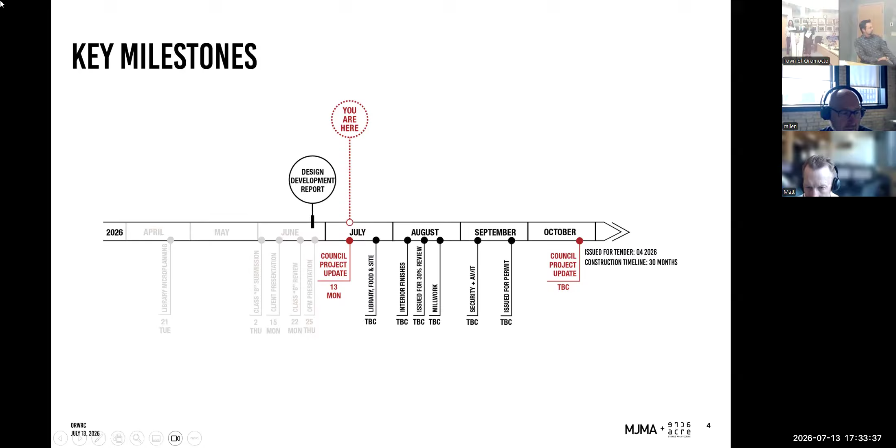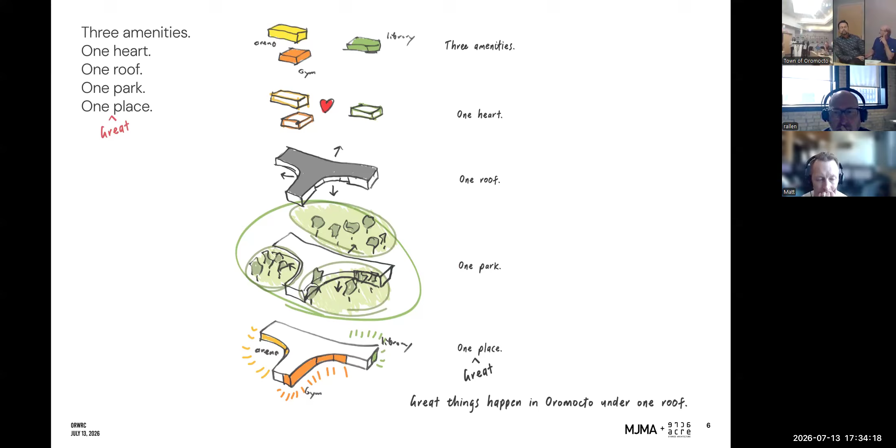So, design of the project: you have 3 amenities in this great project, and one heart, one center lobby brings everyone together. It's going to be the heart of your community, the heart of the park, under one roof, one park, one great place. We're pretty excited that great things happen in Oromocto under one roof. This concept that started early is really coming to life now, and we've stayed true to ensure that all these amenities help shape the goals and objectives you've asked us to hit throughout the project. The first one is that this had to be a destination, one great place, the advantage of taking all these amenities and bringing them together to activate your community and create destinations. That's what's grounding the project.

The second is that the project is a good neighbor by design, designed to enrich its surroundings, and made for magical moments, a place that people use, love, and make life memories in. This is a place you want to grow up and stay, a place that becomes part of your life and your memories, and its backdrop.

Our fourth story element is design at work: it's operationally smart, flexible, and built to bring value. And a place with a pulse - Oromocto is full of life, a destination that feels vibrant, alive, and in motion. Our sixth is from porch to park, connecting community to nature at your doorstep. The advantage of the 3 amenities is you come for a book, stay for the game - the idea that this is an inviting social hub, but all the program activates reasons to come and spend time in Oromocto at this destination.

We talked about these really early on in the project, and now we're seeing those outcomes through the architecture come to life. So I'm pretty excited to share those today.

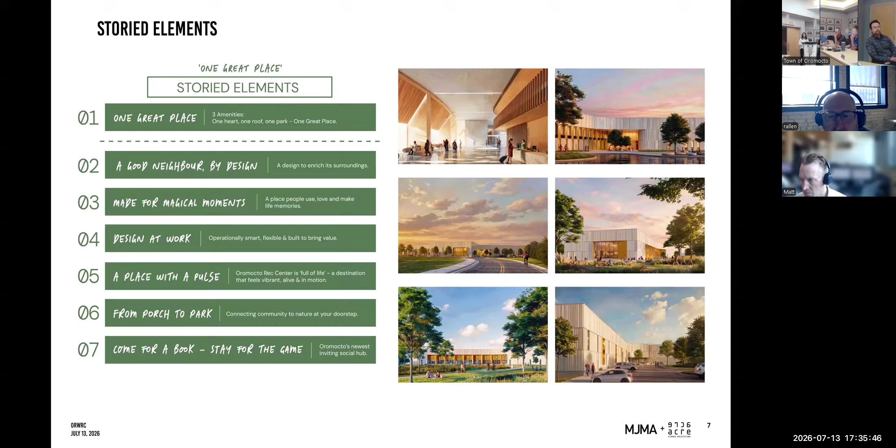Now there's, can I laser this or? Can I just get close? I think I might have done this last time too.

I think I'll just walk quickly. The right. Oh, yeah, all right, down.

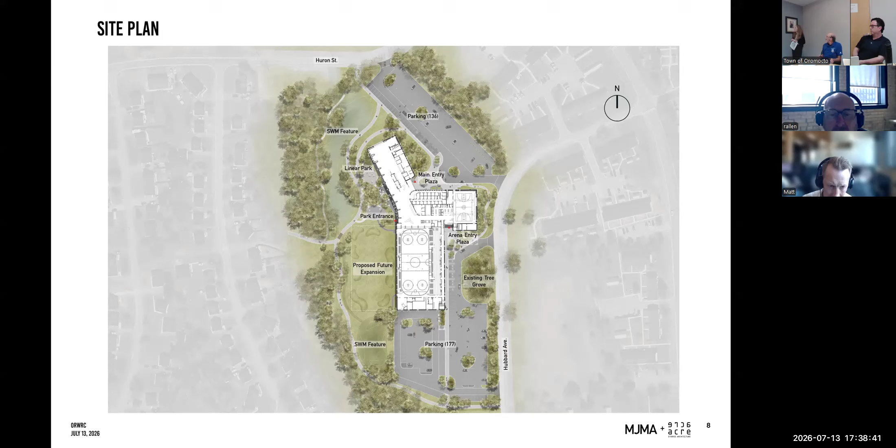How many parking spaces are there? In total, can you go to the site plan? I believe we're at 315. If I were to add those together, that is 313, I think, right now. So we looked at comparable facilities with a similar program to see about the number of parking spaces. I spoke with the staff and prepared some precedents to compare. We felt comfortable with that number.

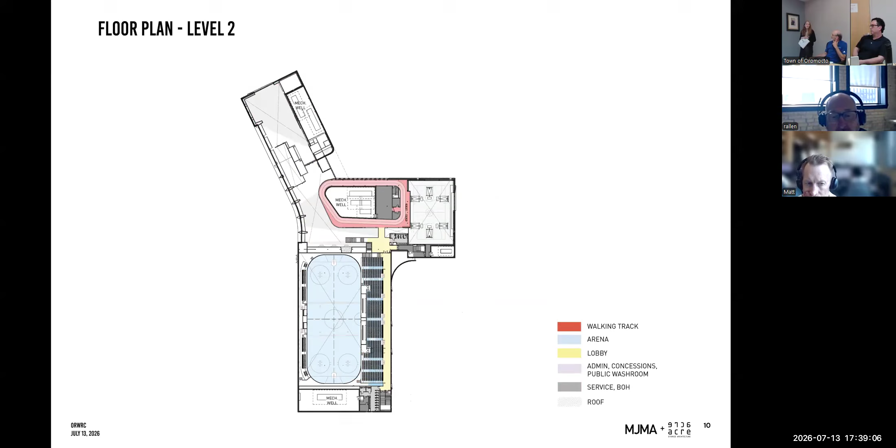So we're going to jump into Under One Roof. Do you want to speak, Monica, to the addresses?

Sure. One of the things that we talked about is the 3 addresses and the 3 identities. We wanted to make sure that each address was clear and distinct about where you come in, where you're going, and that it had its own unique arrival experience, its own identity and its own purpose, while all sharing an architectural language that created a cohesive whole for the project. So while we'll look at each one, Amy, you could walk us through each one.

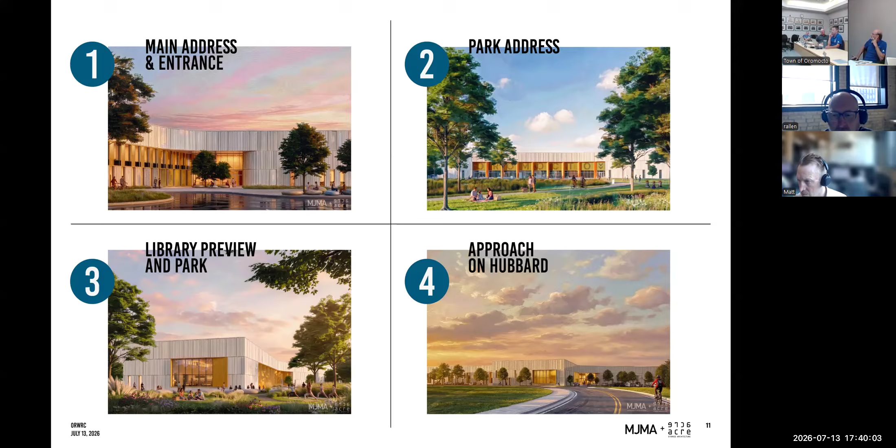The other thing that we have are previews. So sometimes when we have these big buildings, we don't know what's going on inside. So we have these great activators for the outside, where it's kind of like a window into the heart of the project, where you're seeing activity that's happening. So why don't we go through one by one and see what each one's looking like today. This is our main entrance.

So there's this large invitation into the main entrance of the building, glazing in transparency. This is our main address here too. So the articulation of the building welcomes you in, and that's going to continue into the building. You've got these continuous peeks and views into the walking track above, and there's some windows looking into the clinic below, so you can see that activity happening within the building. This is also a strategy where we put a lot of energy into the address and try to find a way to optimize the money on the rest of the facade.

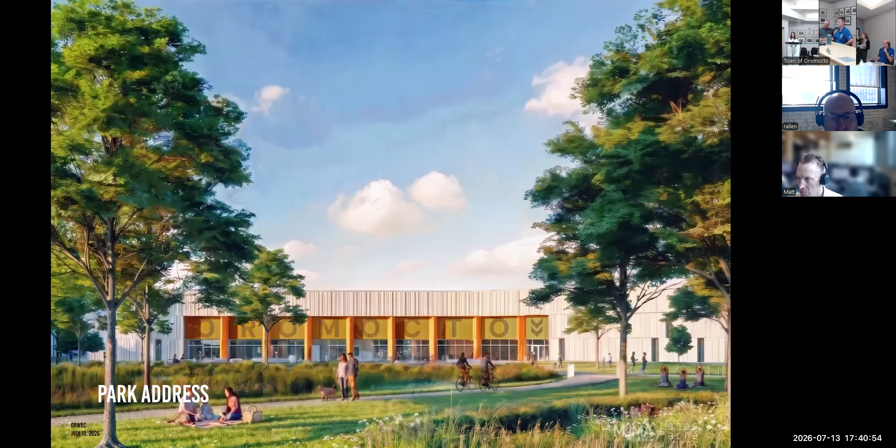So we're putting a concentrated effort at the addresses and trying to find value with the remainder of the project. So in the next one, this is our park address, the view from the west side looking back to the building. We've developed this address to create community pride, with the glazing stretching along from the library through the multipurpose room and the lobby, really creating that connection between the park and the building space.

So this is our library preview, that window into the life of the building or the library. This is the language we're using for the previews, this frame and shape around the larger glazing.

And then this last is a view of the approach on Hubbard Avenue with some upgraded sidewalks, which I think may be happening. But this is your main entrance here and your preview into your gymnasium space as well.

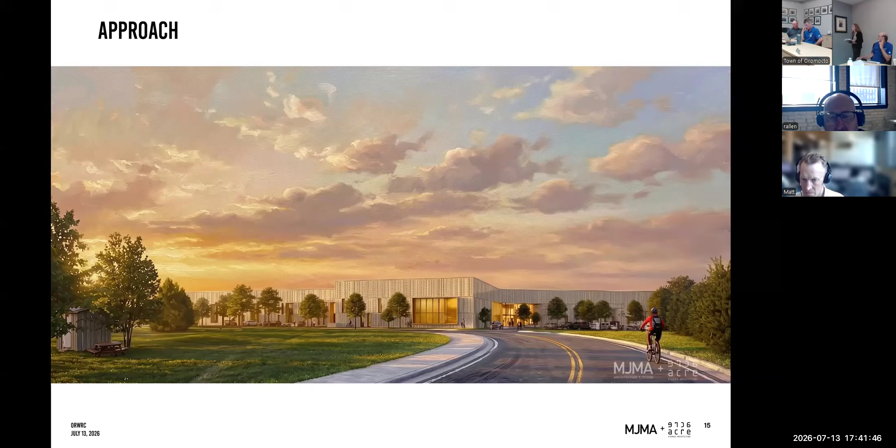So we're going to walk through the phasing. The building has been prepared to be phased should the town decide to phase the construction. The phasing here really did three things: we designed it for some reuse of the materials in phase one, it's meant to minimize disruption during phase two construction, and if phase one does remain longer than anticipated before the arena is built, we've designed it so it's a good looking building all the way around and consistent in its appearance.

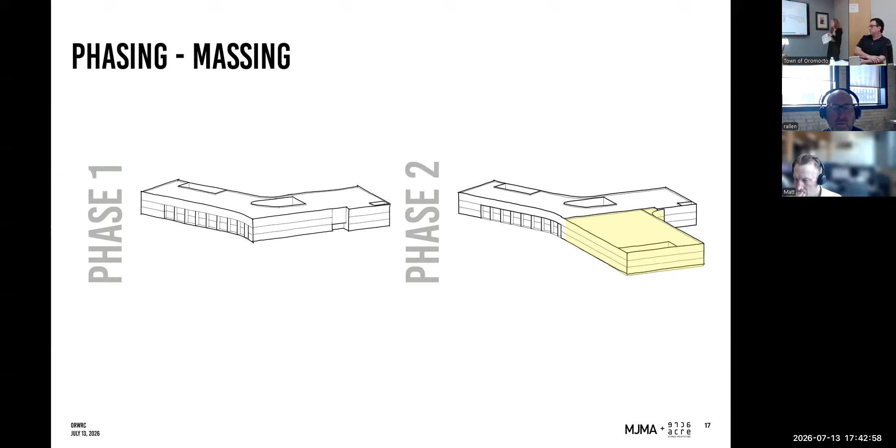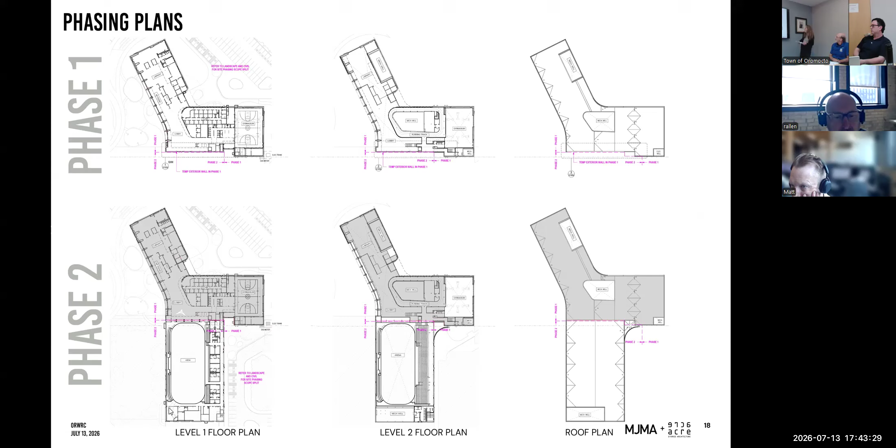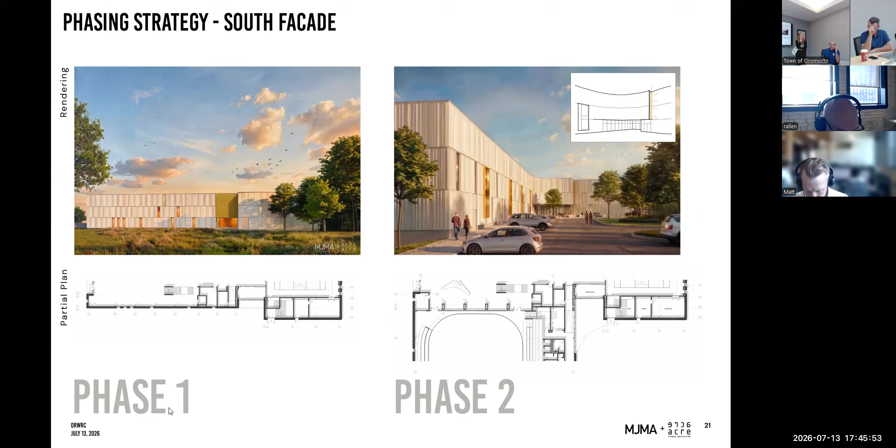Just a quick question about the phasing approach, because phasing could allow you to get a start on a facility that, if you wait for funding for the whole thing in its entirety, you may have to wait much longer. When I look at the building, I see it as three parts, though it's been presented as two: the main part with the medical clinic and gym, then the library, with the arena as a second phase. Is this drawing nimble enough? Because through federal and provincial partners there are different pots of funding for different things. So let's say we were able to secure money for an arena first, before something else. Does it have to be phase one the way you've designed it, where we get that first and wait later for the arena? My perspective is that if we're able to secure funding for any portion, as long as it makes sense, that's something we should think about.

If you wanted to do the phasing differently than we've done it now, there would be a cost to the schedule, because there'd be redesign involved.

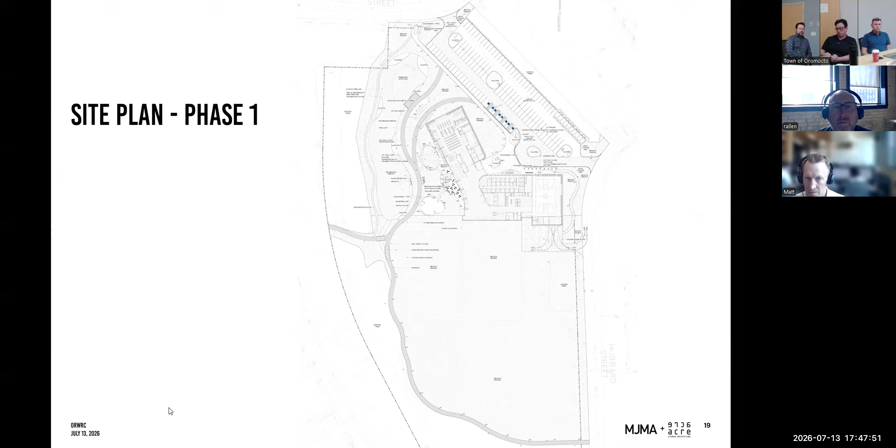I guess that's maybe a question for the CAO: are we committing ourselves to this chronology and phasing, and then hoping we get the funding to fit it? I would say yes, we're committed to the chronology. On the funding side, it's not a hope, it's what the landscape is telling us. The likelihood of funding libraries, medical spaces, and recreational spaces is far higher than arenas right now. So we thought carefully about what's likely to happen first and sequenced it that way, because that's what the funding landscape indicates. So these chronology decisions were based on reliable information provided to us, and our professionals designed it this way because of those funding opportunities. Yeah, that's right.

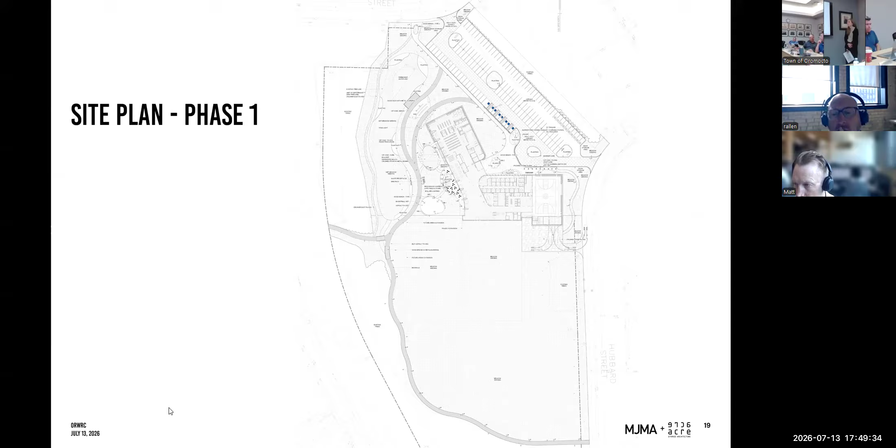Is there anything you want to add, Robert, about the phasing or sequencing? I think it's been pretty well captured. The challenge is always that the first phase you build has to have all the places for the water to come in, and the transformers. So there really does have to be a chronology, because phase one has to come with an attached electrical room and primary servicing package, and that's how it's been done here. This aligns with what's been said, because there was a better shot at funding this series of program types over the arena. As a result, you also get a clean line we wouldn't otherwise have, so the cost of the renovation or phasing isn't as much as it would be if it had to dissect through things. There's an advantage in constructability as well.

Okay, so we'll talk a bit about the walking track. Sure, so I think the last time we talked we had some great feedback.

We appreciate the feedback from this group. I think we were able to expand the thinking of the wellness walking track. We talked about it as a destination, less as just an activity for exercising and walking, and more as something social. We started to think of it as a journey through the building, with these three addresses, circulating through all of them and seeing how they change. It's more inclusive, with an opportunity for anyone to get through a loop. For someone who wants to go further, at 100 you can do 10 laps and reach a kilometer, but everyone is included to be able to do just one. We're trying to get people to connect through the different activities, the daylight changes, the views, and especially with one another.

Whereas a walking track where you may well go around the rink and see the game, this chance you're gonna see how the gym's being used one way. You look over the lobby, it's something different. You come around, you see new people in the lobby, you get a chance to connect and pass by each other a bit more. So we're thinking about this as a destination circuit that's as much social as a walk through the park as it is a conventional track.

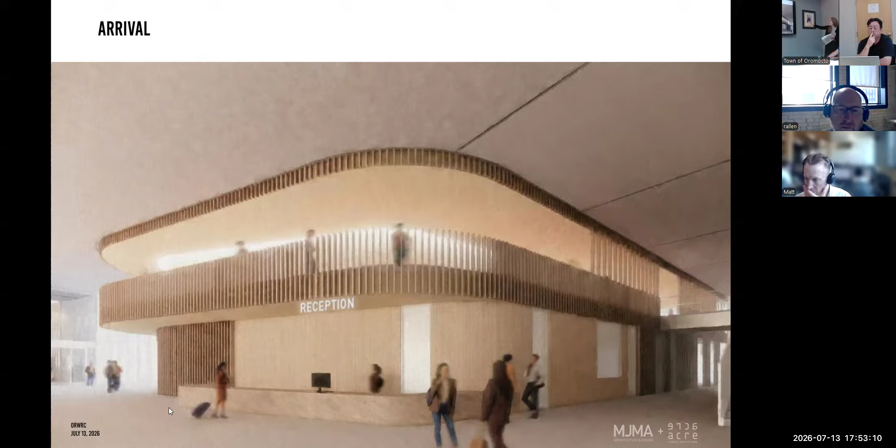As you get on the walking track, you can see down into the lobby. There's some additional space for stopping, taking a look, lounging, sitting or resting. And as you keep going, we've got a peek into and views down, looking below into the arena ice from the walking track.

Then as you circulate around to the gym, there's this breakout space for seating. You can put a few exercise bikes up there if you want to add some variety, and you get to see the gym in its fullness from that spot.

Then you move on to another experience, with these windows lining the north side of the track, looking at the entry plaza, the daylight, the trees, and people coming and going in the facility. From the outside, you'd have a similar but opposite experience looking in, watching people go by.

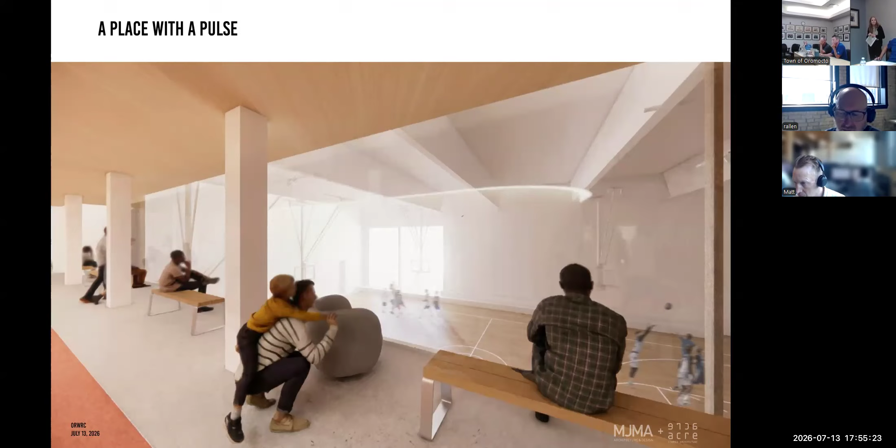We didn't, we started with just the function, and now it's kind of taking shape based on things that make this project more unique. So it's coming together.

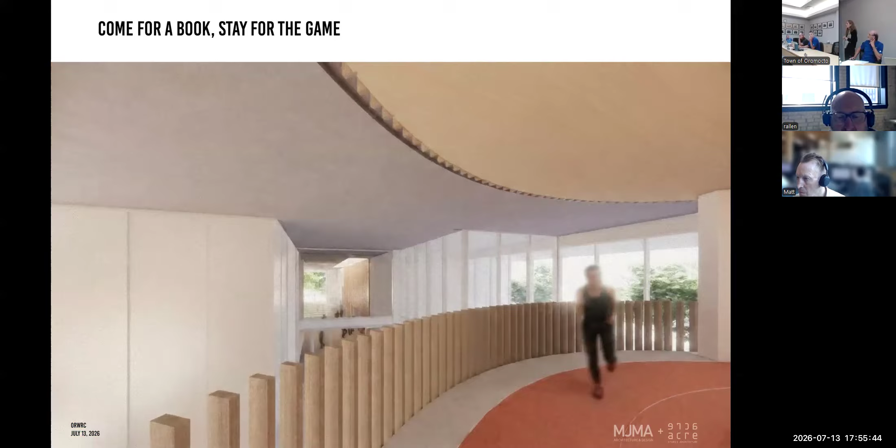As you make your way around, we also have a view from the top down into the library through that access at the entrance of the library, the stacks beyond, all the way to that preview that takes you out to the sun. That's exciting. And then, continuing around, the view down to the lobby, the park beyond - this is looking bright, it's a very sunny day in these renderings, but that's the park beyond.

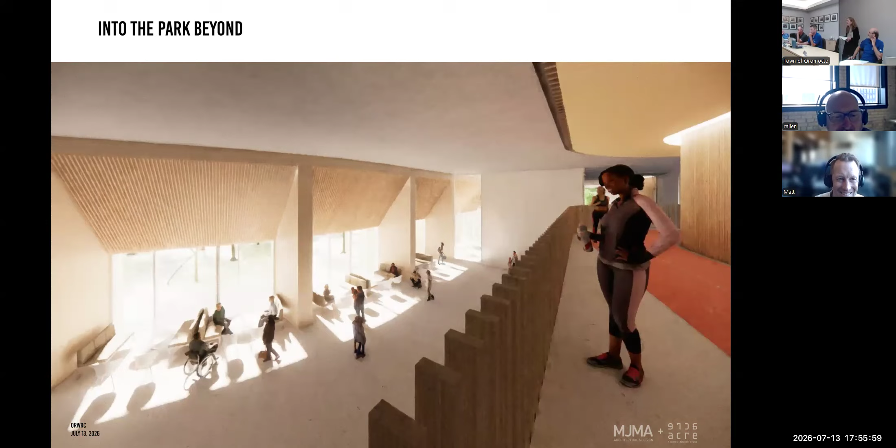So we'll end on the budget review. We've been responsibly tracking our budget since we started the pre-design phase with you all before we had a design. We did a Class D cost estimate in October of last year, a Class C cost estimate, more of a schematic design report in December, and then in June here, once we align on the phasing approach, we did some redesign to address the phasing for Class B costing.

So we were at about 721 per square foot at Class D. We got down a little bit more at Class C, then the square footage went up slightly between pre-design and schematic design - the area of the project did increase due to the phasing, the efficiency of moving some items, and the additional space needed for the phasing and the structural space between the arena and the new building. But we are looking at a lower square footage cost at about 695 per square foot, which we feel is fairly consistent with what we're seeing out there.

So right now the full build out was 69.9 million construction cost. You guys are also thinking about the full project cost here - these estimates are the construction costs.

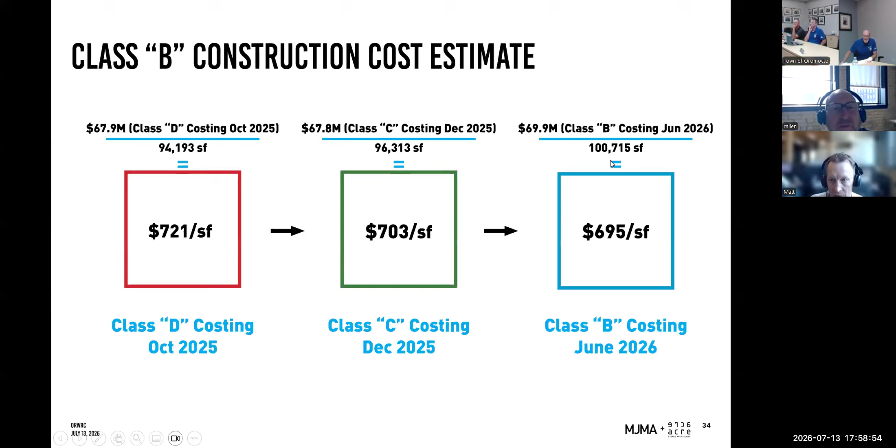Any questions or comments, council? Councilor Rooney. Thank you, Worship. Just a very quick question. When I was perusing through the designs, and reflecting back to past conversations we had when you were here...

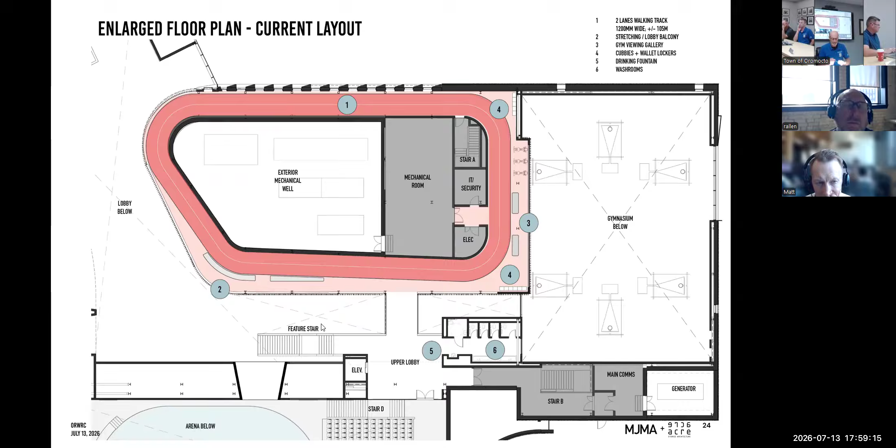So my question is in phase 2, was there a place for a small canteen? I also recollect that we were talking - maybe it was just verbal - that in the main lobby where you come in, where you can see the walking track, maybe a small canteen or reception area could be set up there. I don't think I made that up, but I'm just curious. Good, I'm glad someone has validated my thoughts. So has there been discussion in terms of where that could be placed, and I may have just missed it on the design?

So this is the food services area right here. That is still being designed in phase 1 to have the capacity for phase 2, as well as things like your electrical - perfect, we're building that out in phase 1. So we're working with a food services consultant on specifying the equipment specifically, so the main piece is here. I know we did talk about the opportunity for some breakout stalls, like if you have an event or something - a self-sustained vertical piece that someone would bring in, say you wanted to have something up on the concourse, like a hot dog cart or kiosk.

So the primary food sources are located there. In construction documents, I'm sure we'll be talking about vending. We have some vending areas for vending as well, but it's all built into phase one. As long as I know it was thought out, that's all that matters.

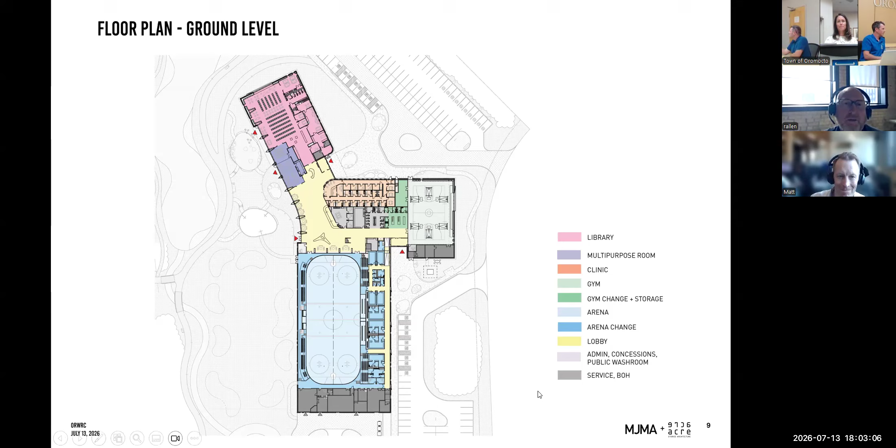Thank you. No, thank you. Thank you, all our best ideas come from our clients. Thanks very much, see you in October. Thanks, Anna and Monica and Matt, Rob. Okay, thanks all, take care.